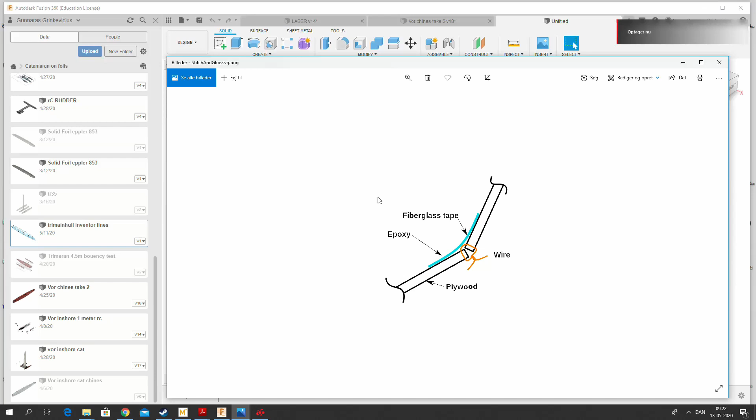Today I would like to talk about a manufacturing technique in boat building that is called stitch and glue, where you basically use plywood as a material for the boat hull, reinforce it with epoxy, and stitch it together with some steel wire or zip ties or whatever you have available to you. Now, the purpose of this video is to demonstrate how you can use Fusion 360 to design such a hull.

Because during the design process of this catamaran hull, I did struggle a lot finding the information on how to create the hull like this in Fusion 360 or many other CAD programs. There are obviously some ship programs, programs designed to build ships like Delftship, etc. But

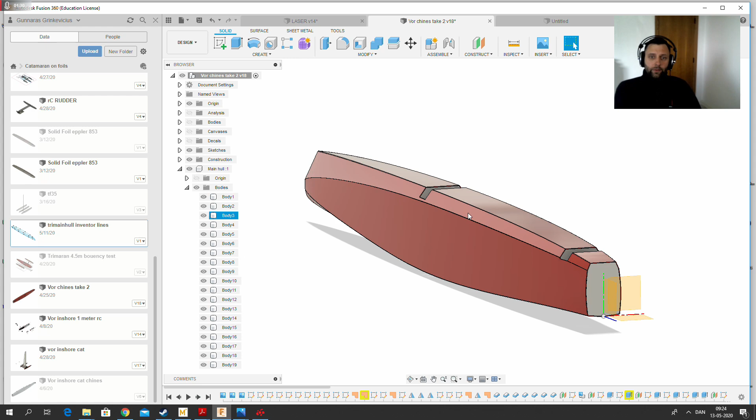the interconnection between a CAD modeling program and a ship designing program like Delftship was rather limited, so I wanted to make this complete project inside Fusion 360 or Inventor or whatever you're used to, and I will try to explain to you how I got here, what methods I used, and we're gonna do a complete tutorial on how to design a stitch and glue plywood hull in Fusion 360.

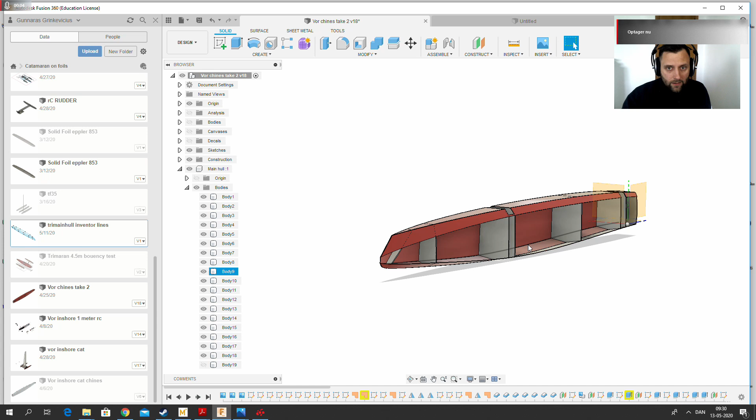Alright, a model such as this is obviously made out of some plywood sheeting and some reinforcement bulkheads. This model is 5.5 meters. I think that's around 18 feet maybe, somewhere in between. And the sheet thickness is 4 millimeters. Well, this was a design I made for a catamaran hull, and

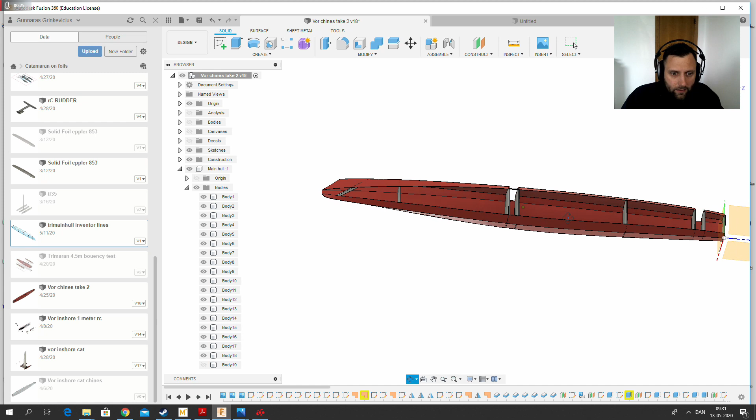when you make something like this, you probably don't just want to go ahead and build a full-scale version in the real world. So make something that is scalable. For instance, this 5.5 meter scaled down to 1/5 of the length would give me a sheet thickness of around 1 millimeter instead of 4, so I can make a scale model out of balsa wood and eventually do some tank tests.

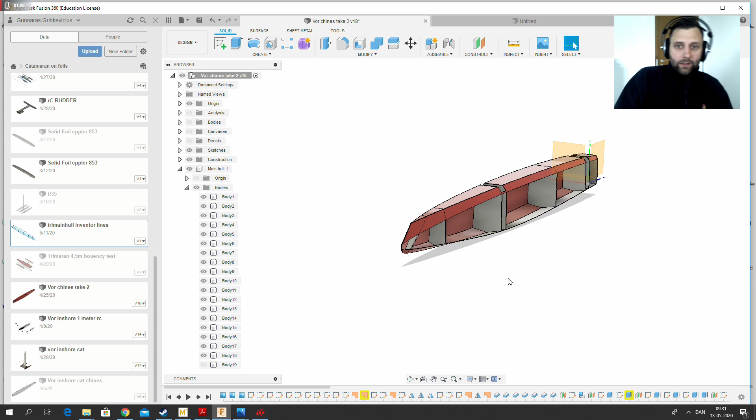Or if you don't have access to a tank simulation, water tank, you can go to a lake, check the stability of the boat. Anyways, let's have a look how to design something like this.

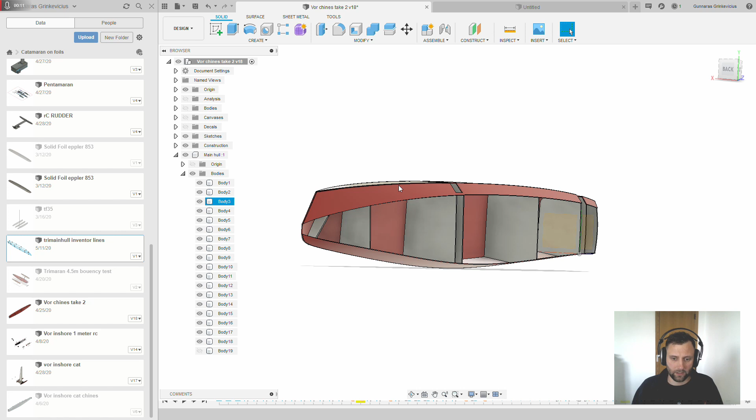Alright, so I have decided that we're going to be building a solo skiff to simplify this demonstration of how to build a stitch and glue hull instead of me just remaking a catamaran hull like this.

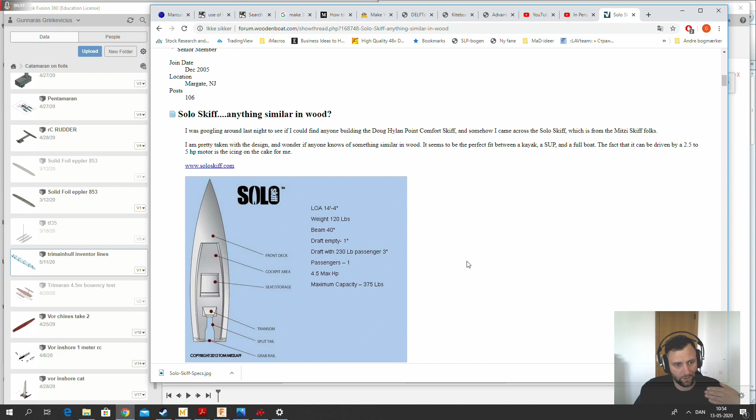Alright, to start with, we will start by inserting the canvas, and the canvas will obviously be the picture that we have found of the skiff, which was here. In Fusion 360, we will start by inserting the canvas from the top, and we will scale it down to, let's say, 5 meters. The way you scale a canvas is basically you right click on the canvas and press calibrate. Then set 2 points and define a distance. In this case it would be 5,000 millimeters.

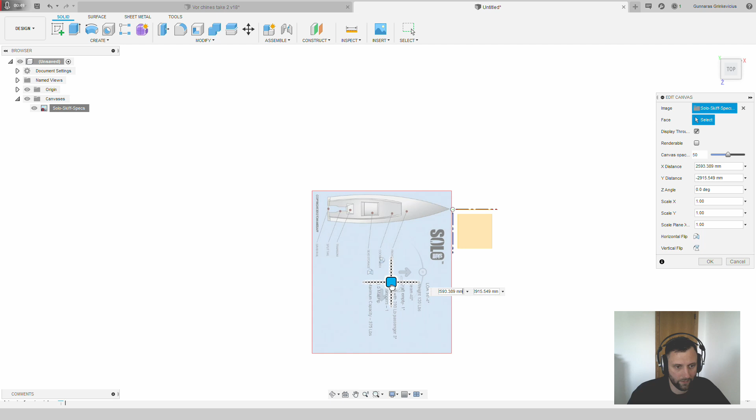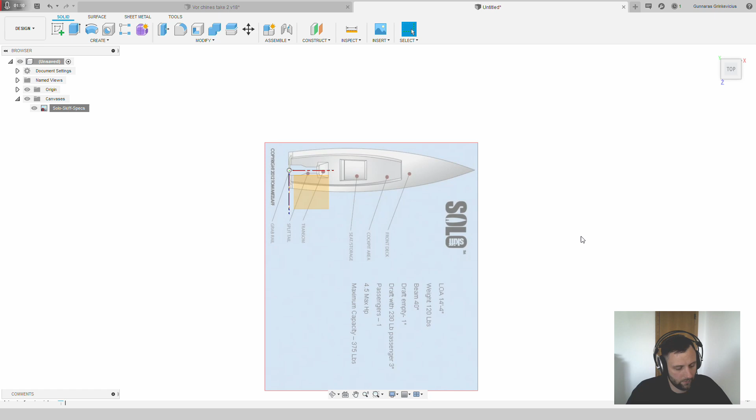Now let's see, our origin point is here, and what I usually do when I design something like this, I move either the front or the aft of the boat, the stern of the boat, to the 0 position, which makes it a lot easier when you start drawing various layers upon layers upon layers. You can always fall back to a 0 point that you have defined. All right.

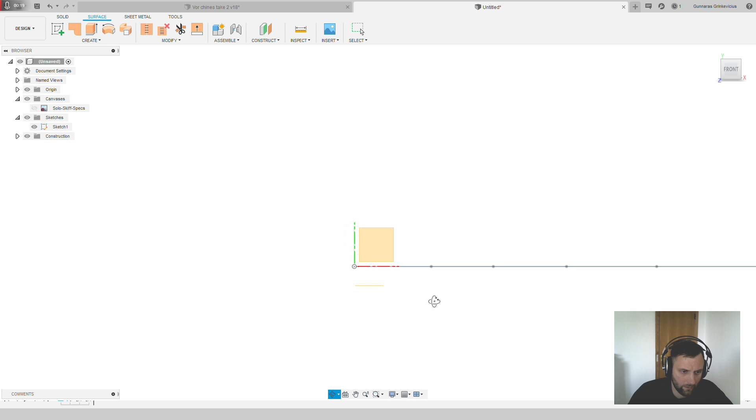So now we have this top layer sketched here, and what we are going to do is offset our sketch plane approximately 200 millimeters, and we will do that because if you look at pictures like this one, the layer in the bottom would be smaller than the layer on the top. So thus we will offset the layer and we will make a sketch on it. Let's go up.

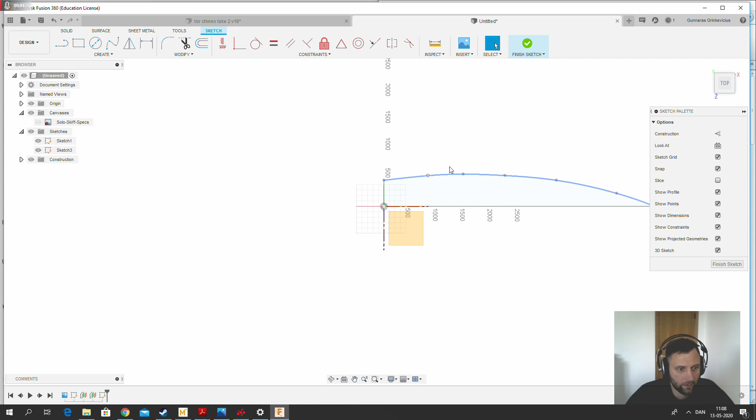The aft portion of the ship is approximately the same, but what changes is the position where the front would end. So, alright. Now, please remember to uncheck the 3D sketch option, otherwise it will be a mess.

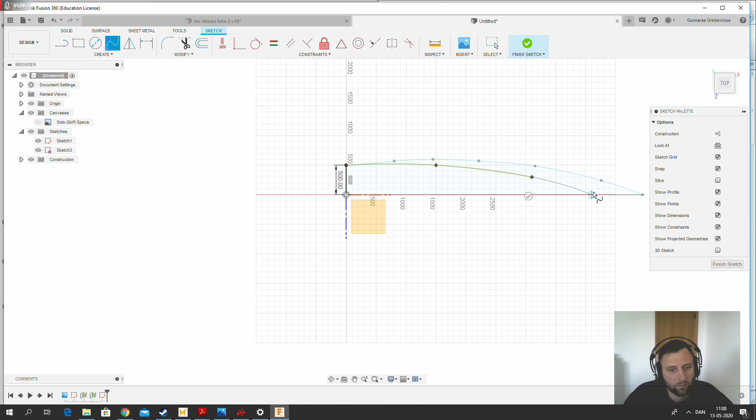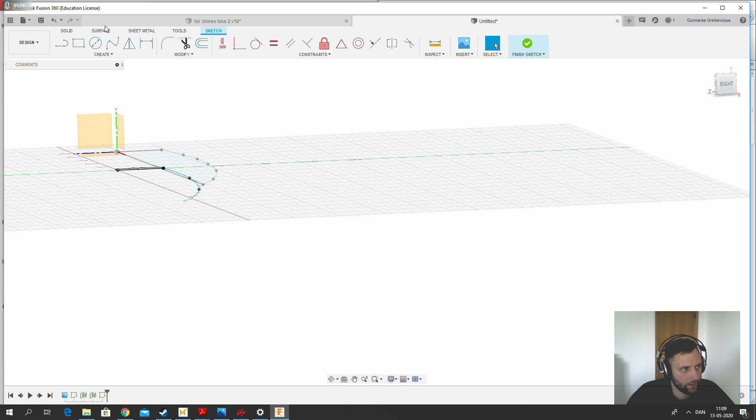Now, when creating something like this, we're obviously gonna need to do some 3D sketching, and that's because to create a surface you need to have enclosed faces, which means we're gonna need a line from here to here. But since we have this fixed sketch, this is not an option.

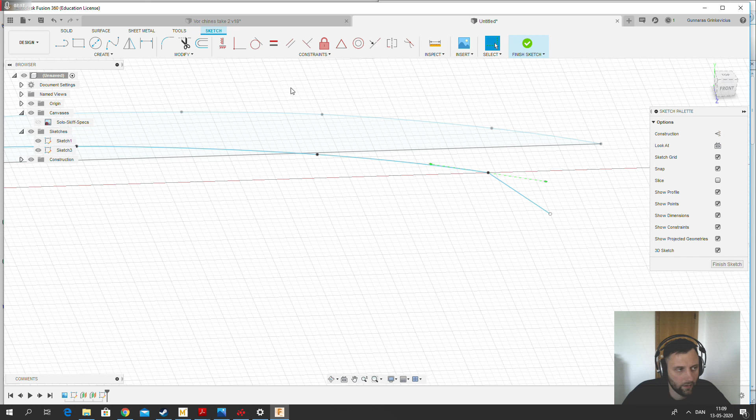So the way we're gonna do this is we're just gonna make a random straight line, accept it, enable 3D sketch. Select this point and we're gonna move this point to there. All right. And the same we will do here. Finish sketch. Now, what this will allow us is to select the edges, delete, like this.

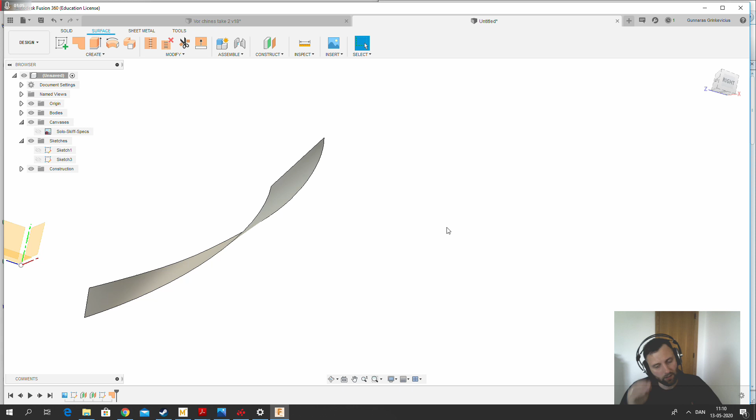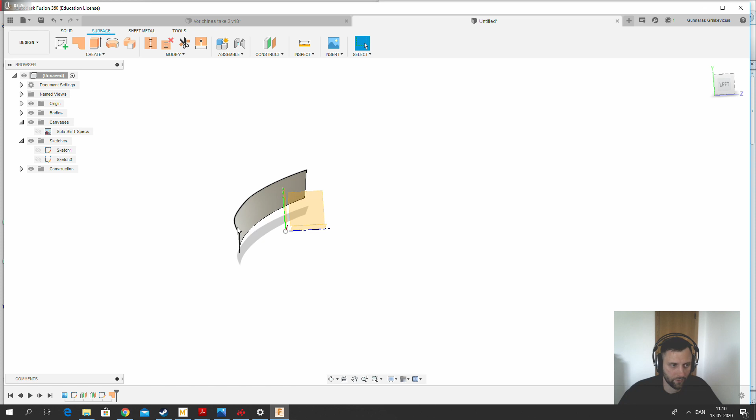See, now we have this sort of perfect contour, perfect surface of the plywood. It would have the shape that would be cut and bent. Later on I will show you some software that you use to unbend plywood like this, so you can basically cut it out of a flat plywood sheet. Alright, let's continue designing our solo skiff.

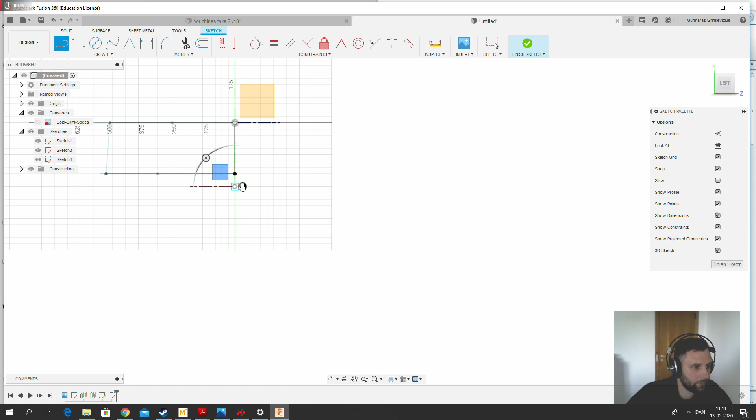We go back and create another one here, and well, a skiff like that would most likely be pretty flat, so create another sketch on the side, and let's say it will be something like an extremely small bottom curvature. Okay. Finish the sketch, go back aft, create a sketch.

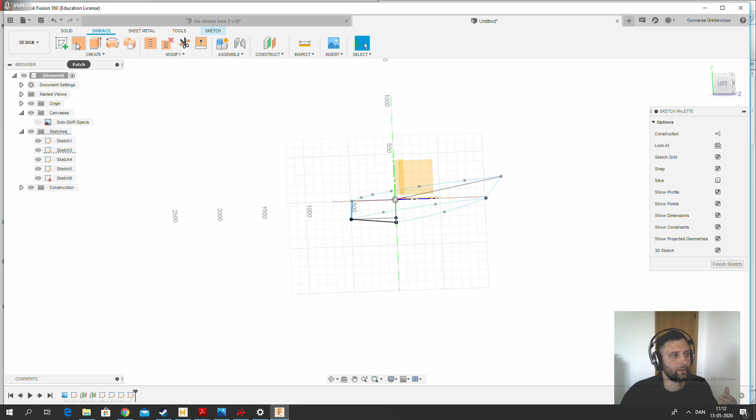Remember, you must enclose all the faces. So we're gonna make a face here, we're gonna make a surface in between this part also. This is very important, otherwise you will not be able to patch the surface. Alright, let's finish the sketch and see if we can create some surfaces.

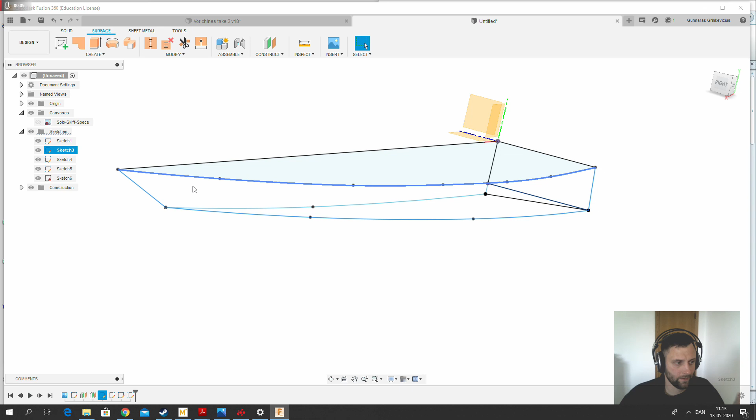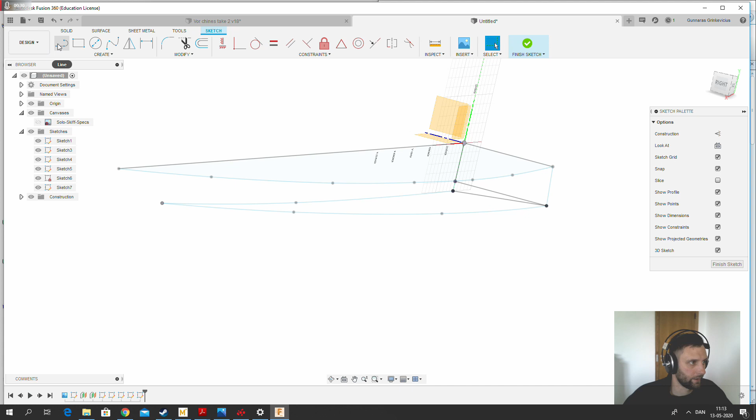And while doing all this, I just noticed that there's something you cannot do. For instance, if you make a sketch like this, you need to make this line separate, otherwise when you try to pick it to create a patch surface, it will not work. So if we choose to edit this line and delete this face, finish sketch, create a new sketch, doesn't matter where you create it, but here we go. Alright, finish sketch. See, now this will work completely differently.

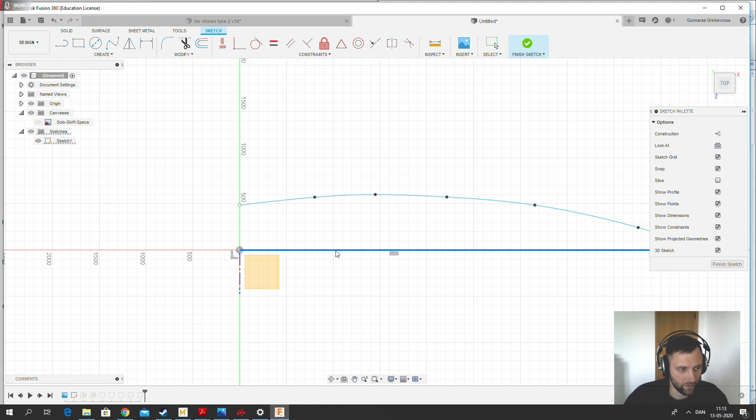The same applies for this sketch. What I'm gonna basically do is edit it, remove these parts, finish the sketch, create a new sketch. And the layer height is the same, very nice. From here to here, and from here to here. Perfect. Let's finish the sketch. Alright, so let's try to patch the surfaces and see what we can and what we cannot do and what needs to be fixed.

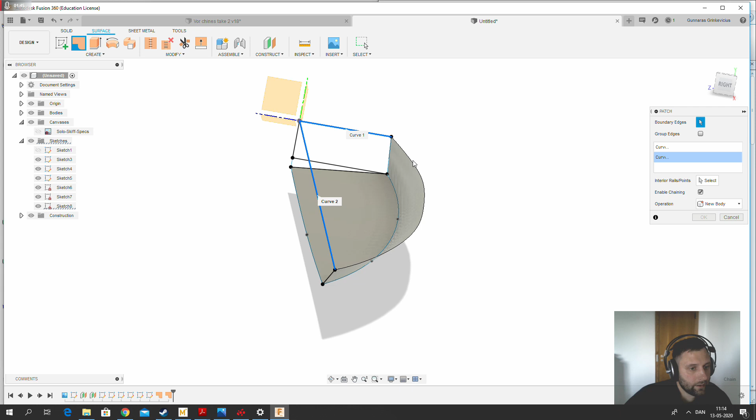So we can create this one, very nice. Let's see if we can create this one, very nice. And let's see if we can create the last one, the top layer. Patch this one. All right. So at this point we have 3 surfaces here, and we can also make the aft one if we wanted to, but it's basically the same principle, so let's wait with that. All right.

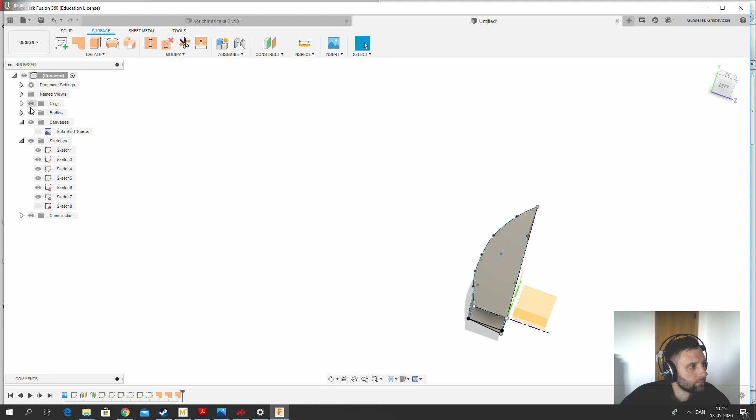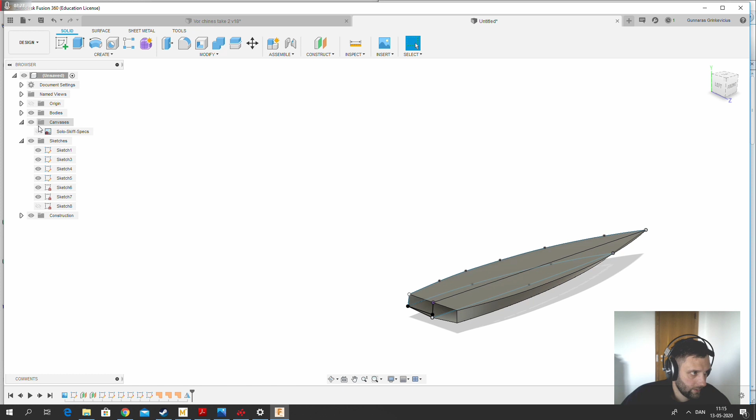Let's go to the solids, mirror all of this, and the mirror plane would be this one. All right. So what you have now is roughly a shape of a solo skiff. If we go back and turn up the canvas, the beauty of working with Fusion is that you can edit all of this on the go. So let's say we are not satisfied with the position of the front, we can basically move it by editing the sketch.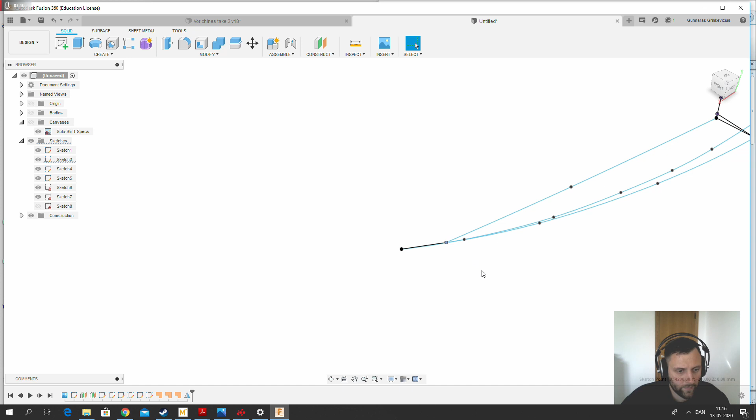In this case we would hide the bodies, edit the sketch, say we wanted... the wrong sketch that I'm editing. Let's edit this one, edit sketch. Alright, yes, this one, finish sketch. See, now when I turn the bodies back on, the surfaces would have moved along. Alright, so

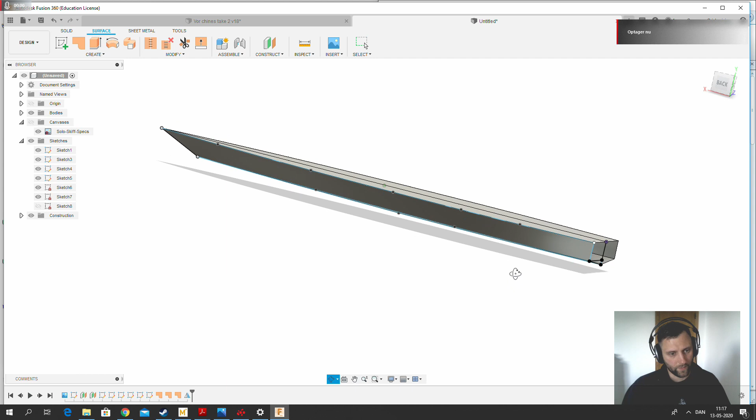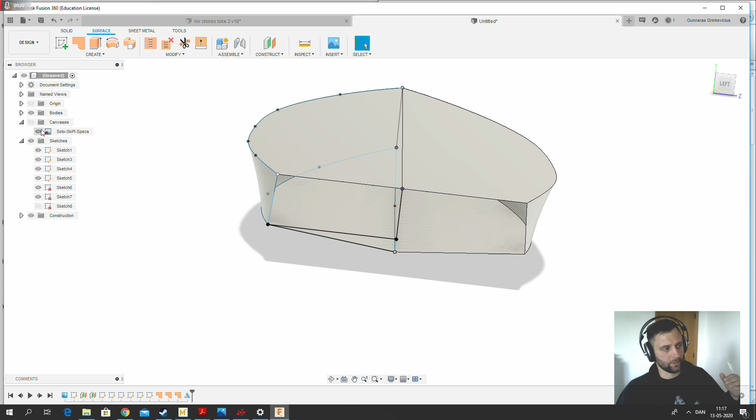what you now have is a bunch of surfaces without any thickness. This is basically an infinitely flat piece of paper that you are watching here. Obviously, to keep doing this, we could continue making an outer sketch here and another inner sketch like 100 millimeters down to create this standing surface that you see right here. But I think you get the idea of how this is done, and plus I will not do it for the demonstration video. Let's remove the canvas again.

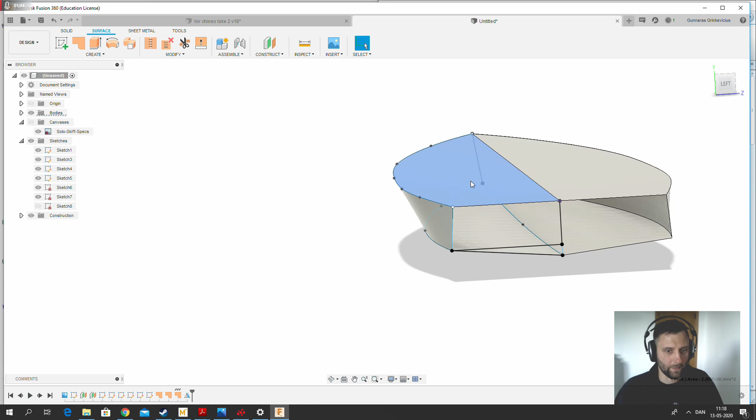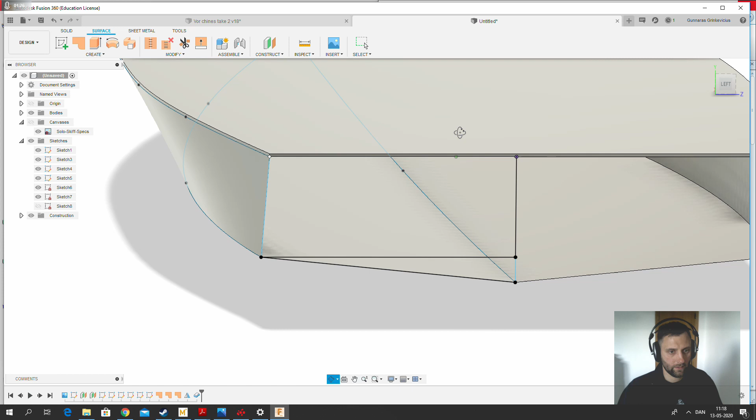Now, what I will show you, however, is if you have something like this part here, how you will do it. And before we go there, let's apply some thickness to all of these plates. So let's say we take these two, and you go back on the surface and you go thicken, and it says down. In our case, we will go up, so that would be minus, let's say, minus 6 millimeters. And it made it a single plane. You could basically have chosen each half and made it.

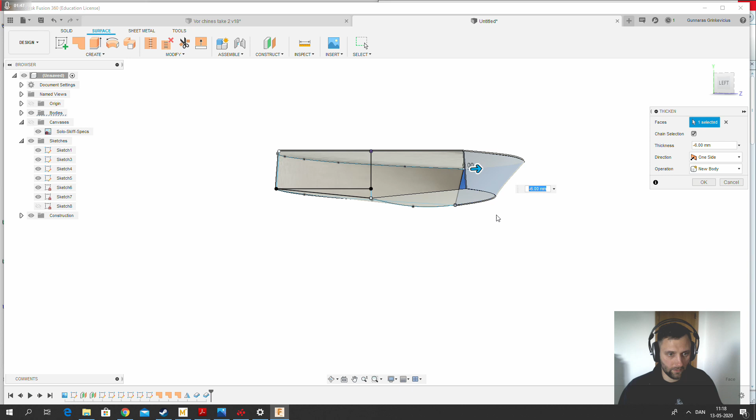So here we would say nope, thicken this one, and that would be minus 6 also. Let's take this one, thicken, and that would be positive 6. All right. Now to the bottom, thicken, minus 6, and this one will also be thicken, minus 6. Perfect.

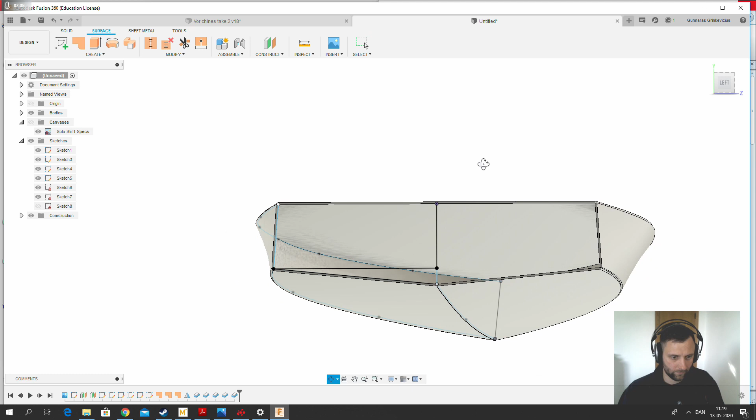Now, let's see. Let's go ahead and create another sketch for the aft portion of the ship. And what we are going to do here is basically we are going to project some lines. So in this case, we're going to project this one, this one, this one, this one, and this one. All right. Let's hide the body, and we have this sketch line here.

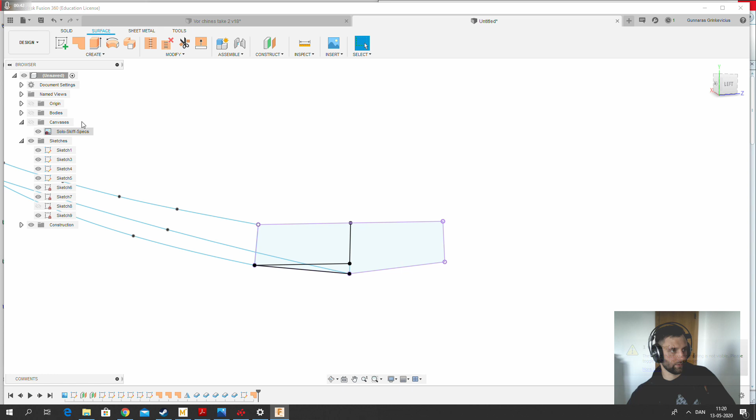And the same applies. Holy crap. And basically the same applies. We can... Nope, that did not work out. Why did that not work? Not visible. Oh, all right. The bodies were not visible. Yes, we now have this body here, and we're gonna do the same thing where we will thicken it. This one, 6 millimeters. Fine.

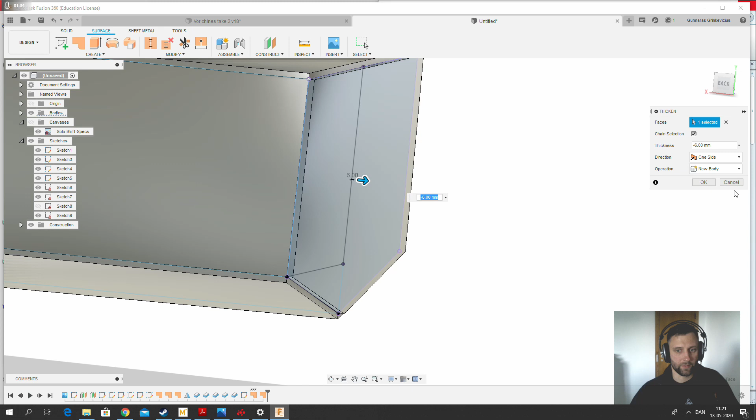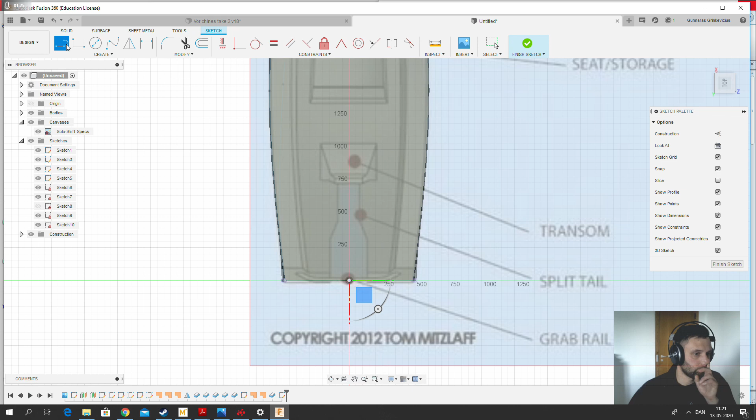Let's go to this section and create a sketch. Let's bring back the canvas, and right here you will probably have the motor mount. So let's say this section you see right here is going to be cut out. Where's the middle? It's here. All right. Mirror everything. The mirror line would be this one. Now, sketch, and let's just extrude everything to remove this nonsense.

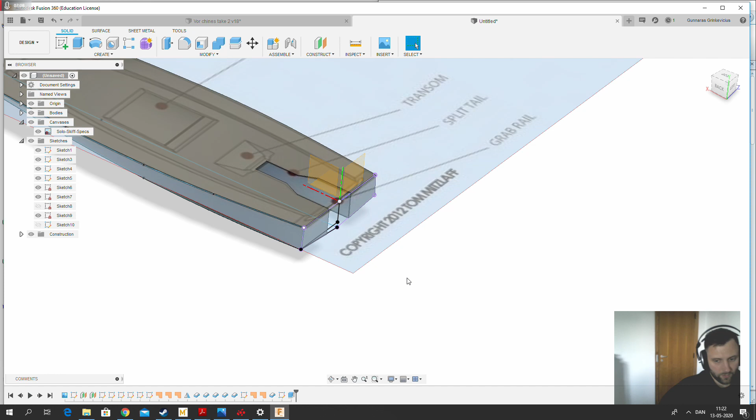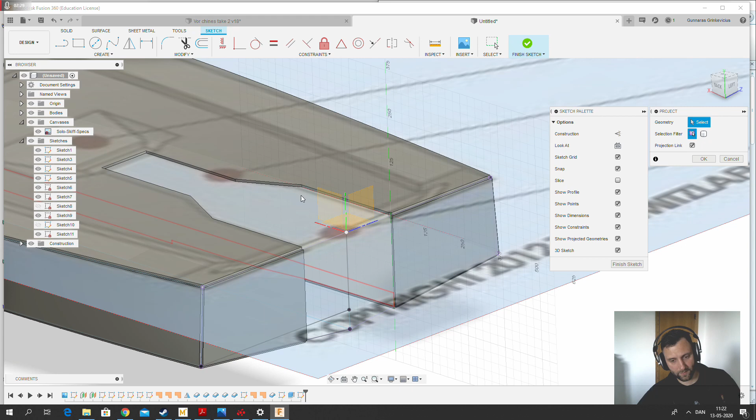Here we go. Now you're left with a huge hole that is not of much use to you, but what you basically can do is click on any flat surface here, create a sketch, and again, as we did on the aft portion of the ship, you can project all these surfaces and make a flat piece of plate that you could install in this position.

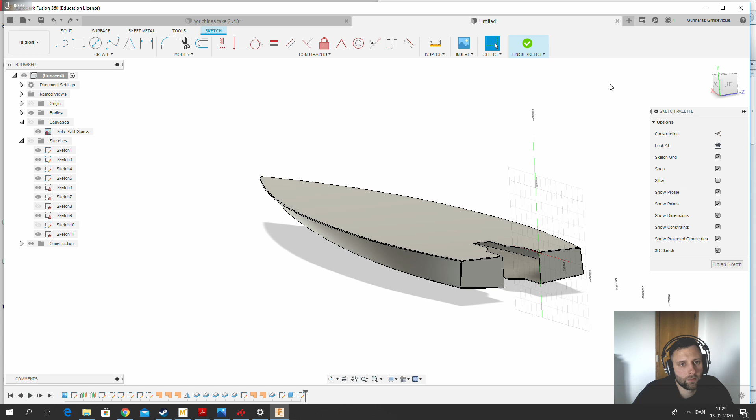All right, let's talk about one of the most important things when you're building a hull structure like this, and that would be the structural bulkheads. The reason you need the bulkhead is to prevent the ship from flexing, because obviously the plywood is very thin and it has no structural rigidity. So there are a few ways you can do something like this. One way would be using this web function. It's very good when you're 3D printing, it's not very good when you're making a plywood hull. So let's look into the other options that we have.

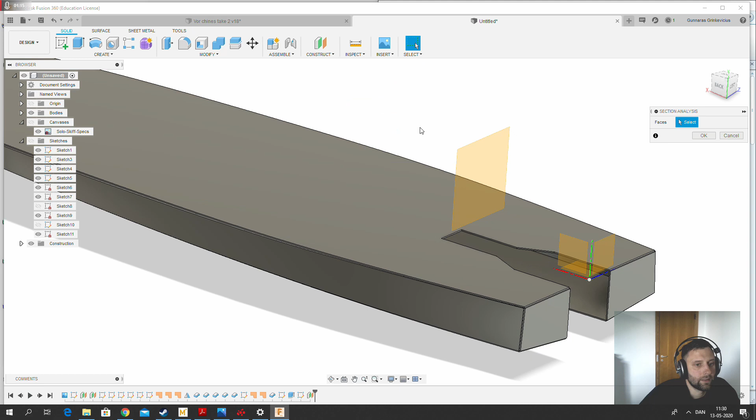The way I did it in the last project at least, was to make a hull, go ahead and offset it. So let's say the first bulkhead we want would be right around here where the engine mount will be. Now, what we would do from here would be something like section analysis. Let's see what we have. Very nice. Remember, when you have section analysis, you can basically turn it on and off. It basically just skips through the hull, so you can see within at certain points of your interest.

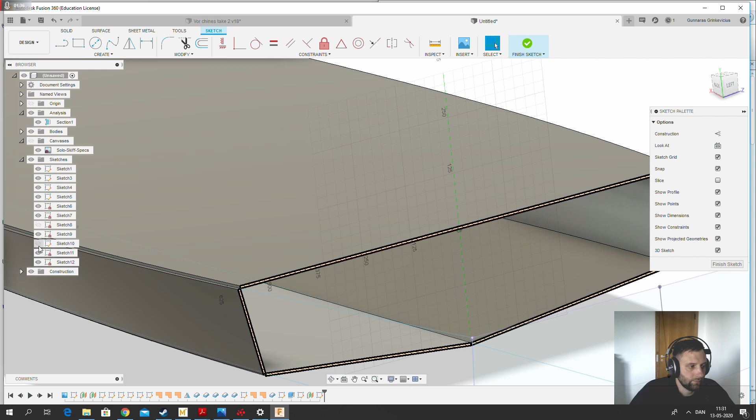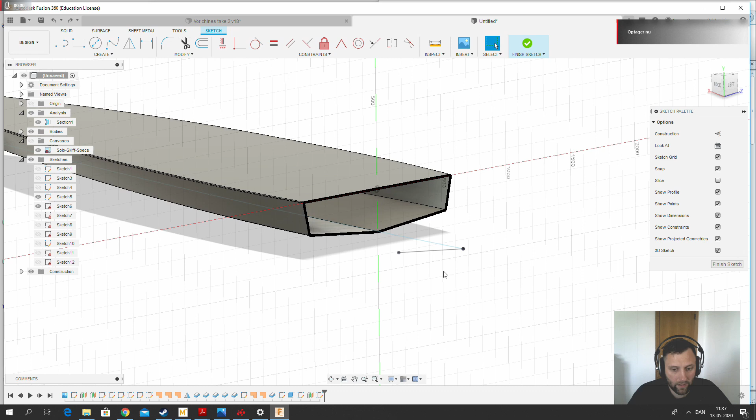Now let's go ahead and create a sketch here, and just like before, we're gonna project some positions. This one, right? Am I doing it wrong? Oh yeah, boy was I wrong. Alright, let me show you how you do this. Sketch 12, nothing is here.

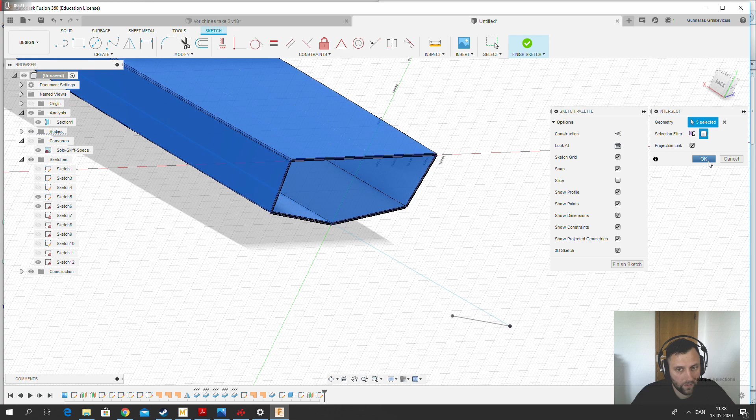Perfect. So you're gonna go to Create tab, Project, Include, and you're gonna choose Intersect, and you're gonna choose Bodies right here. And you're gonna take this one, basically all the inner bodies, and this one. Yes, alright, here we go. So let's say this one, this one, this one, this one, and this one. Let's go ahead and break the link. Nice. What we want to do now is finish the sketch and patch this if we can.

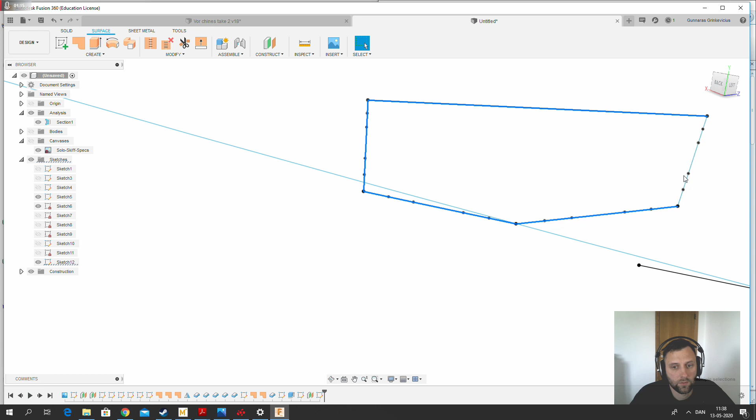There's probably a smarter way of doing that, but I am not a Fusion 360 professional, so this is basically how I figured out how to do it. Choose. And it does not work. And why does it not work? That is probably because the ends are not connecting. So let's choose this one. Origin point, target point will be here.

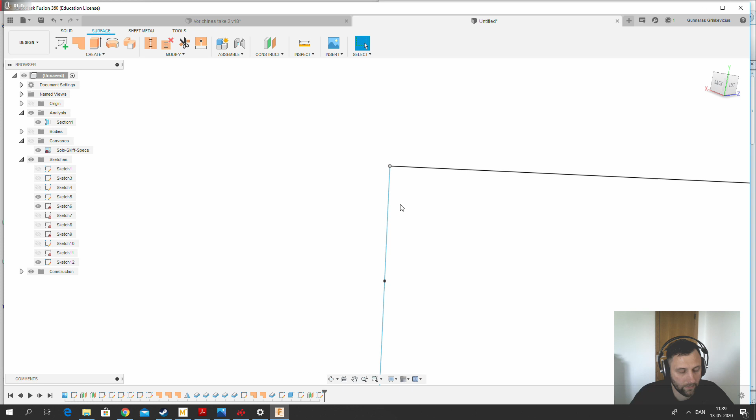Perfect. Now, when you project, as we've just seen, the edges of the drawing are not always connected. So you need to remember to do that as well. See, offset. Take the point you moved, origin point, and the target point would be the last position. Same applies for this one. Move, origin point, target point, perfect.

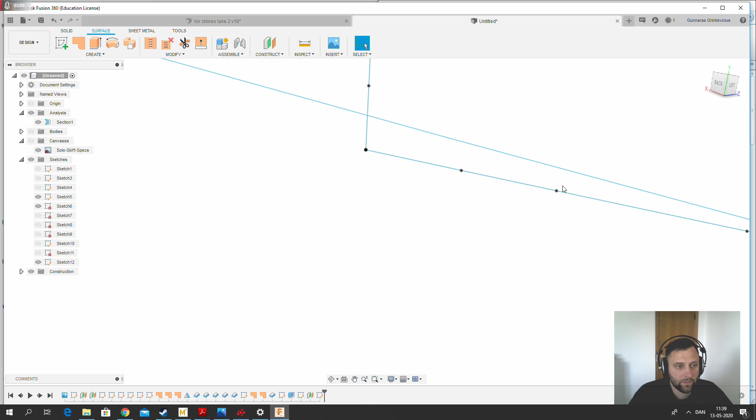If you find an easier way, well, some of you probably do, please let me know.

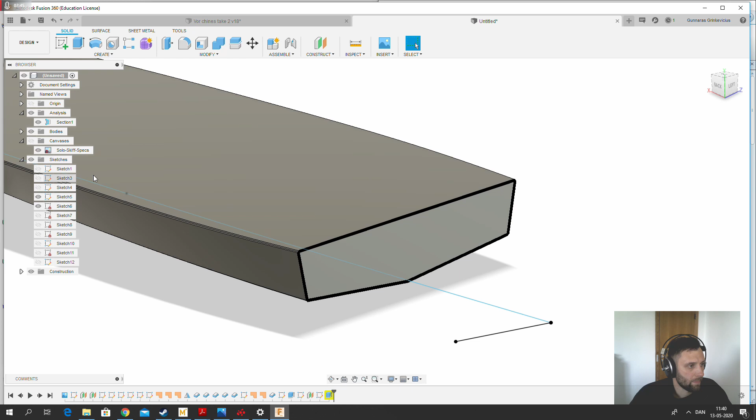Here we go. So we have this, and instead of patching it, I already have a flat surface, so luckily for us, we can just extrude it. Let's say we want the bulkheads to also be 6 millimeters, and bring back the bodies. And let's remove the analysis section. Now you're stuck with the bulkhead in there. And if we go back to the stitch and glue part, you will see that each and every layer here is separated. So yeah, pretty cool, isn't it?

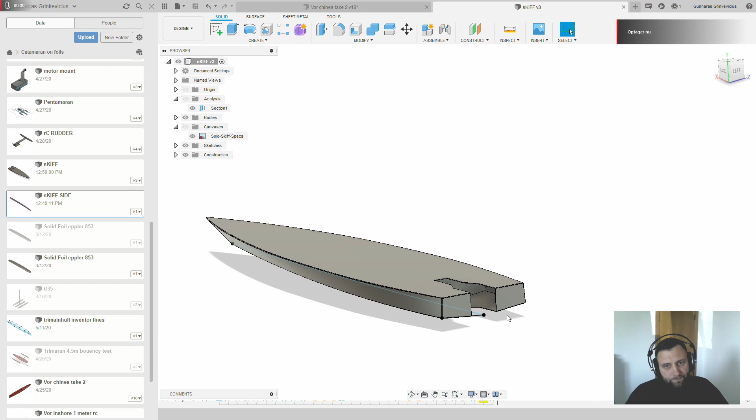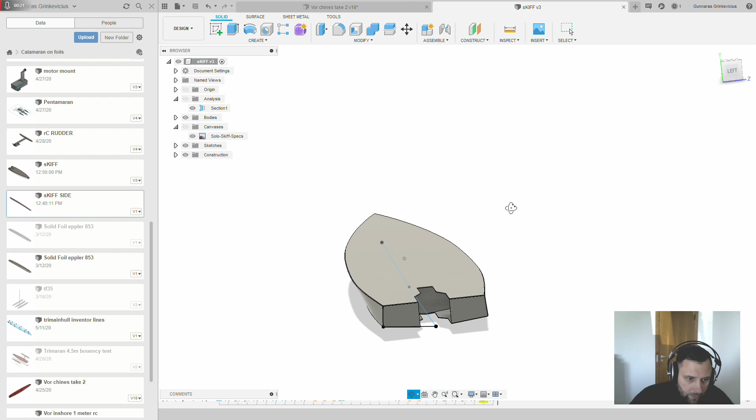Alright, so for manufacturing purposes, to make this useful, what you really want to do is flatten these sides, the ones that are curved, so you have an idea what shape you need to cut to achieve this shape. And the way you do this goes as follows. You hide all the bodies that we made, and when I say bodies, it's because they have thickness here. And you find a side plane like this. This is a surface. You right click on the surface, save as STL, and you export it. You save it to a specific folder.

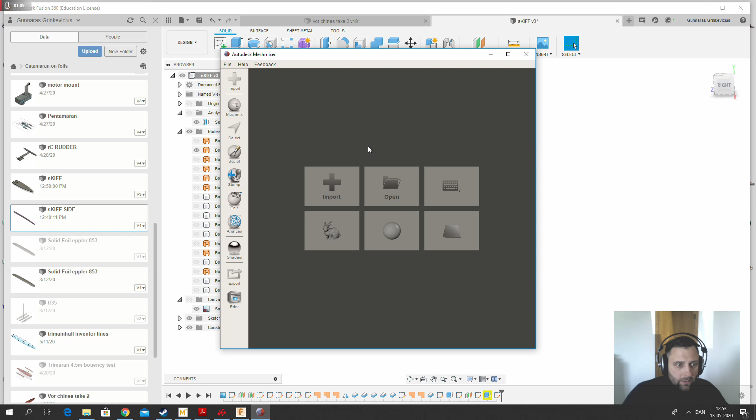Now, once you've done that, you download a software called Meshmixer. It's also from Autodesk. It's very powerful software. It can be used for a lot of cool stuff, but in our case, we will show you how to flatten the curved objects that we use in this type of design. So let's go ahead and import it. There we go. This is our side. As you can see, it is curved, not very useful to us. We press edit and unwrap.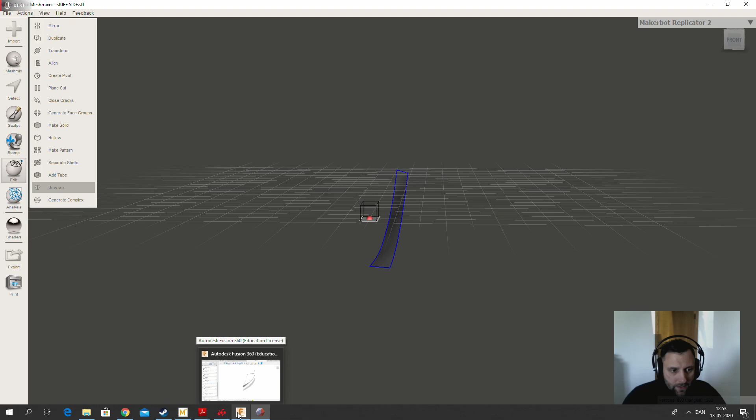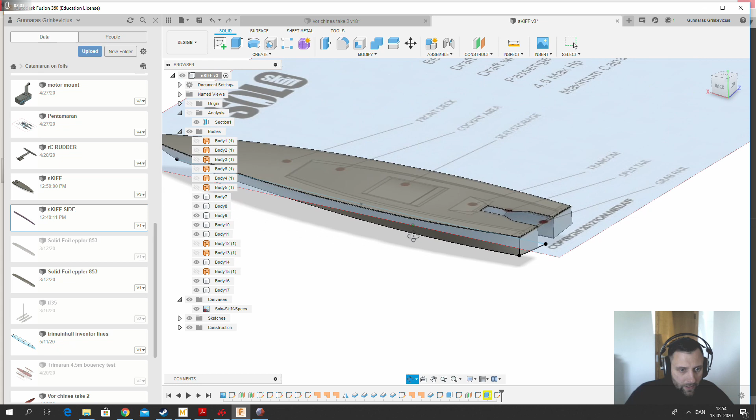So while this is doing its job, it's going to take a while. Let's go ahead and talk about this hull. As you can see, we have not included this patch here where you basically stand in and have these lofted sides above, but the process is pretty much very similar to what we have done with these sides, only inside the hull. And if we look at this hull from the side, you will notice that these lines are more or less flat.

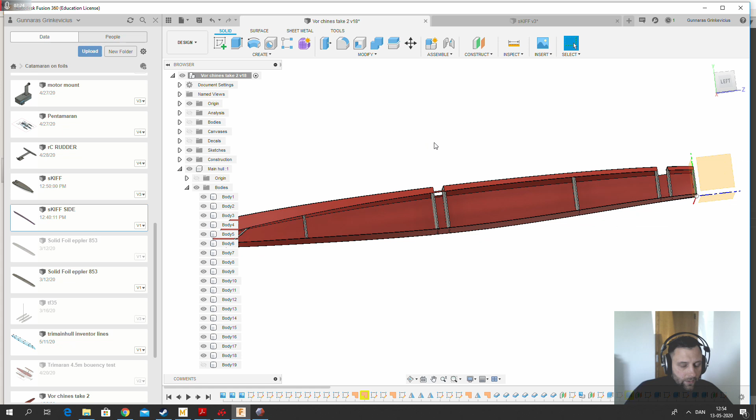But if we take a look at the catamaran hull, I have made the first contour from the top, which would be this and this outline. And then afterwards I moved into the 3D shape and moved the drawings down. Again, make them separate. So you have this three-dimensional drawing on which you can then create a patch surface. So back to our skiff example.

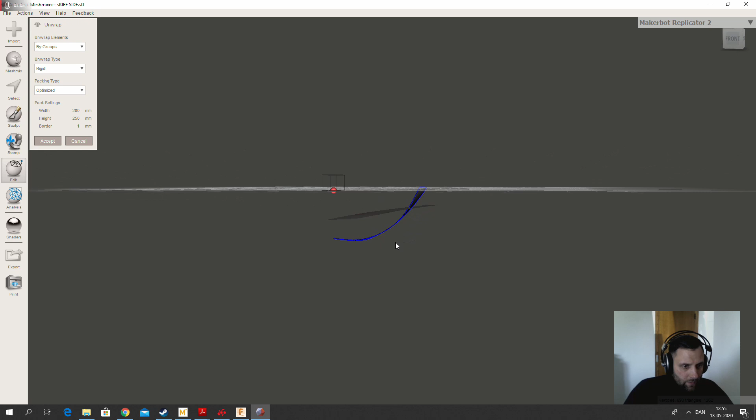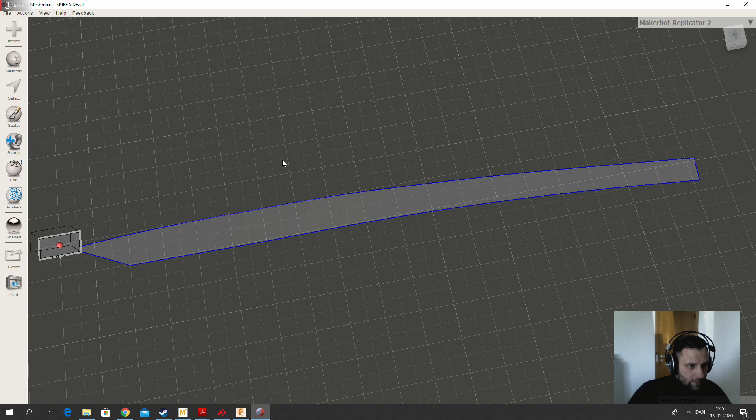Let's go take a look at Meshmixer, and as you can see, it has portrayed the curved surface onto the flat. Especially if you look from the side, it's completely flat, it has no width anymore. So let's go ahead and accept that, and the skiff side, the original one, we're just going to delete, it is of no use for us anymore. Alright, let's take this one and export it as an OBJ file. I've already done that, so ignore this for a moment.

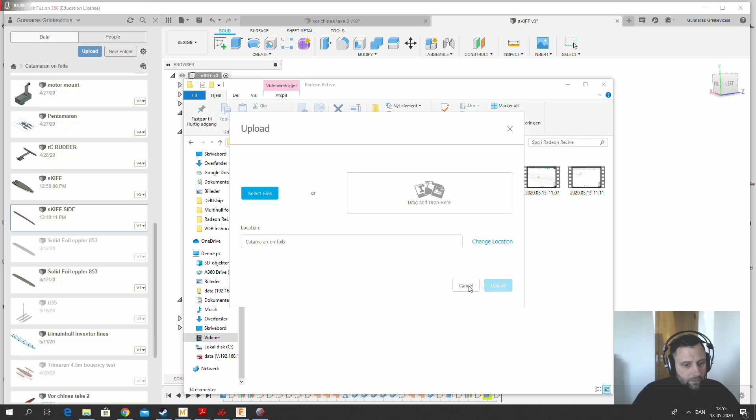Then you're gonna go back to Fusion 360 and upload the file, which I have also done already, which is right here. So let's go ahead and open it. Now what you have here is an OBJ file that you basically cannot use for anything at all. So what you really want to do is open it, right click and mesh to BREP. Let's go ahead and do that, make a new body.

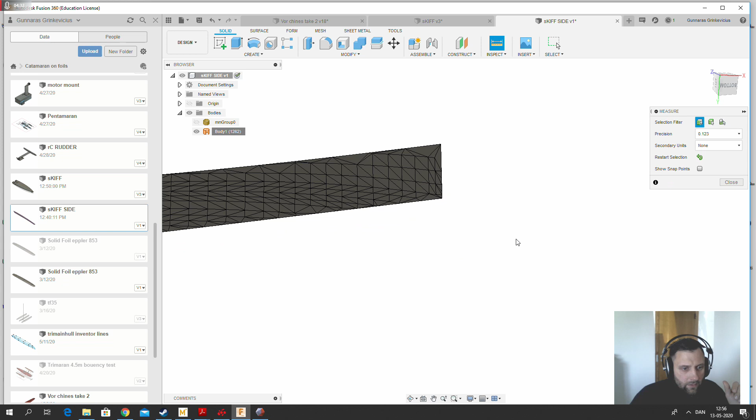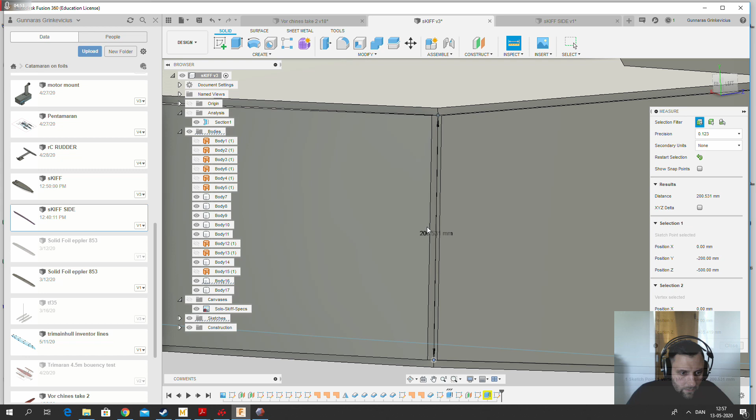Now there's one thing that you need to be very careful about when loading this, and that is to check the distance. As you see, this distance is 50 meters, 5 to the power of 4. Yes, you see this distance now is 2005.3 millimeters, and on our boat that we designed, that distance is 10-fold less. So what you want to do here is grab this body, scale 0.1. Here we go. This is the original scale. Now it's right.

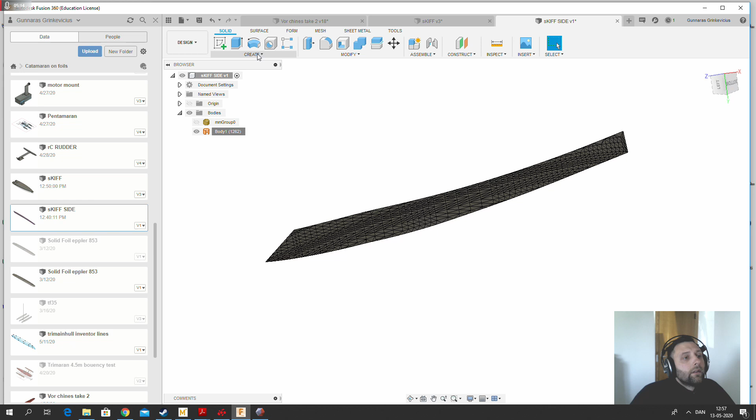And as you remember, we said that this was 6 millimeters. So let's go ahead and grab a surface, thicken, take this one, 6 millimeters. All right. Here we go. And now we have this exact surface portrayed flat, which you can send to a drawing, or you can basically send it to some milling production, unless you're gonna do it yourself, of course.

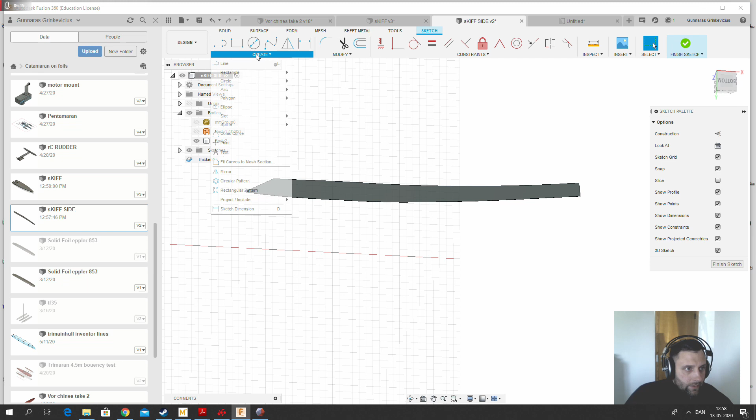So let's see, front, top, scale 1:4, 1 shape. There you go. If you want to make a DWG file, you can always create a sketch on here, and of course project this whole area, remove this, and break the link. There we go. Now we have a projected sketch of this side.